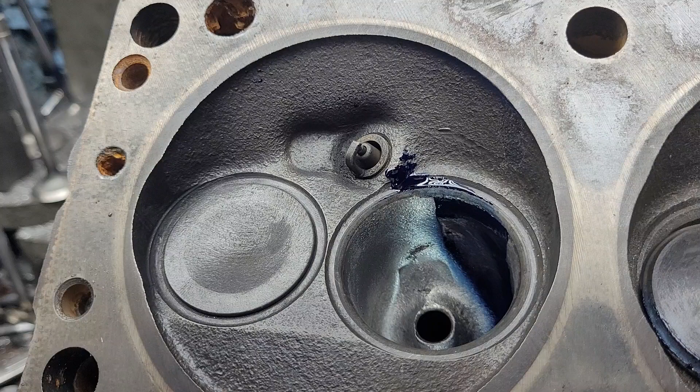Alright guys, I promised I would do just a bowl blend. So the valve job hasn't been touched. The bowl blend is what I consider a deep bowl blend. I did not do the guide, I did not touch the valve job, but obviously we got some liquid improvement. That looks nice and wide on the side of that bowl.

I'm actually quite happy with the way that turned out so far. I did take a lot of metal out of the bowl. I was quite impressed with how thick these castings are, 300 plus most areas. That means if you're a do-it-yourself type of guy, you can basically take 100 thousandths off everywhere if it's not a corroded head, and you should be more than safe.

We got a little Dykem on the valve, on the evaporation ridge, and this very edge here has got blue on it. A couple little splatters, but overall pretty good for a bowl blend.

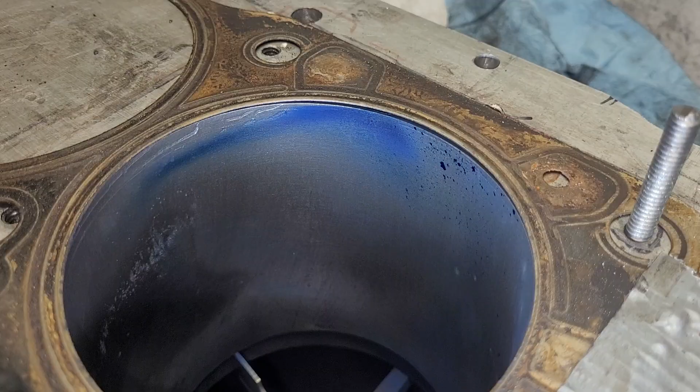Let's take a few more views of this. Before I forget, let's take a look at the bore adapter. The flow around the bore adapter is quite a bit different. Completely stock, it only had a small coating at the very top.

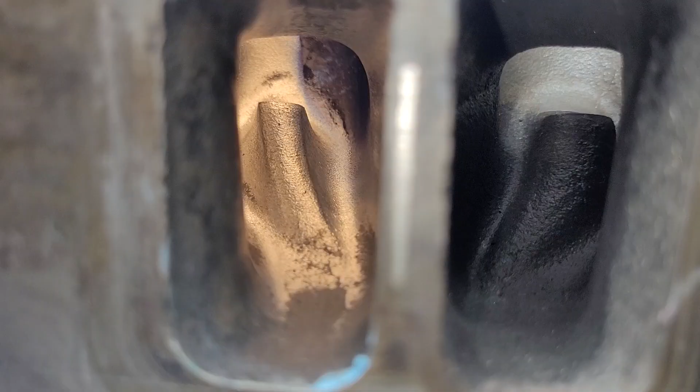Deep bowl blend means I took part of the guide boss out, but it's nowhere near shaped the way DV did it. You can see I definitely did parts, the bowl was considerably wider than it was, but there are still spots on the bowl that have the stock finish.

Because of the way the stock bowl is designed, it's bigger than it should be in certain spots, I should say. The pinch hasn't been touched, so it's quite tight. And I did do some work on the short side.

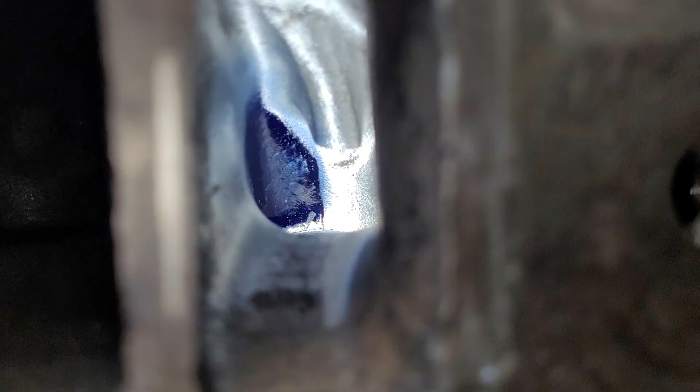Let's flip it and take a look. You can see the short side radius did get widened a little bit on both sides, according to the air speeds. I did not really change the top of the short side radius. You can still see the casting marks from the mold.

You can see the Dykem still has very much a straight head. The other side of the short side radius got the cuts removed, blended, widened a touch, done.

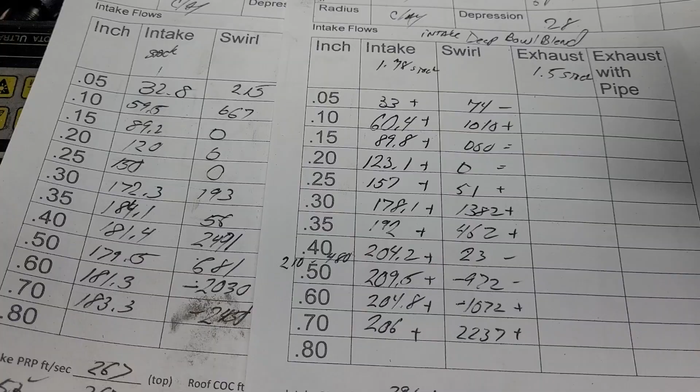Okay, so how did we do as far as flows? Let's take a look at our flows, guys. I don't know if I mentioned it already on this video, sorry, but that bowl blend took me about 3 hours, so it's not a little bit of a bowl blend, it's a lot of a bowl blend. How do we do as far as flow? Well...

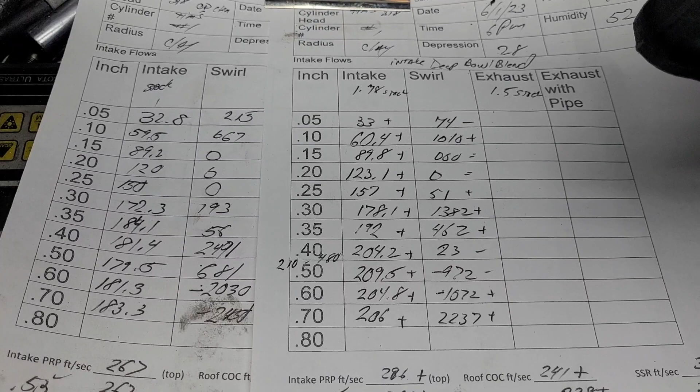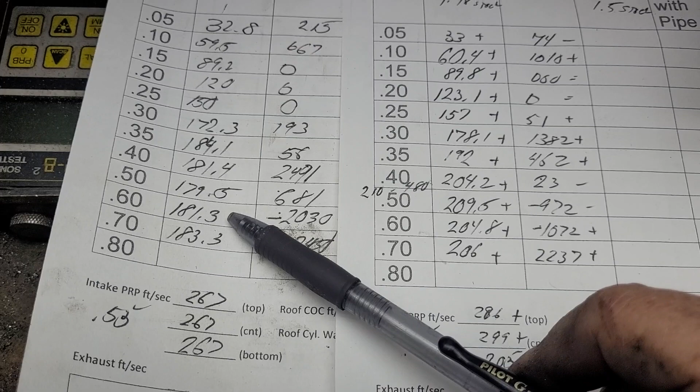Plus, plus, plus, plus, plus. Our peak was 210 at about 480. Our peak here was 184. That's a decent step up for just doing the bowl.

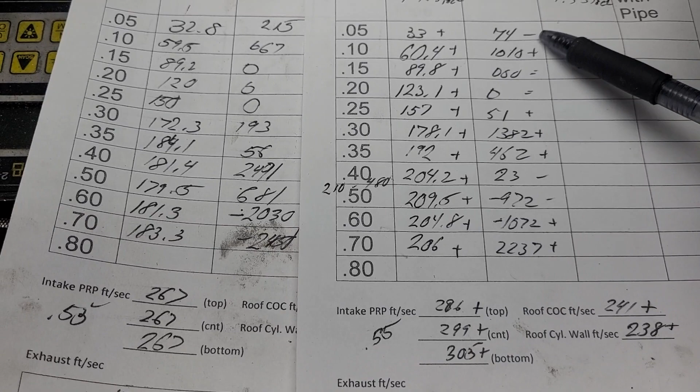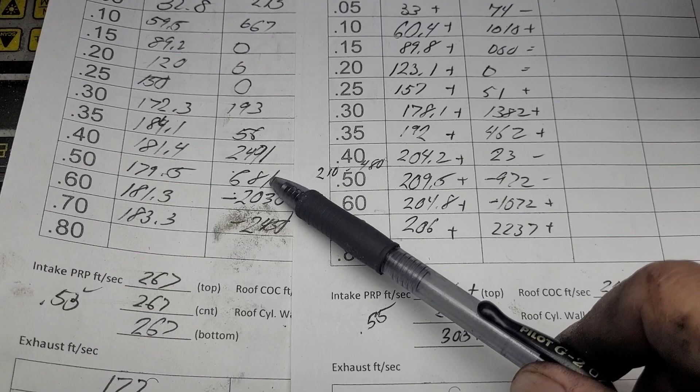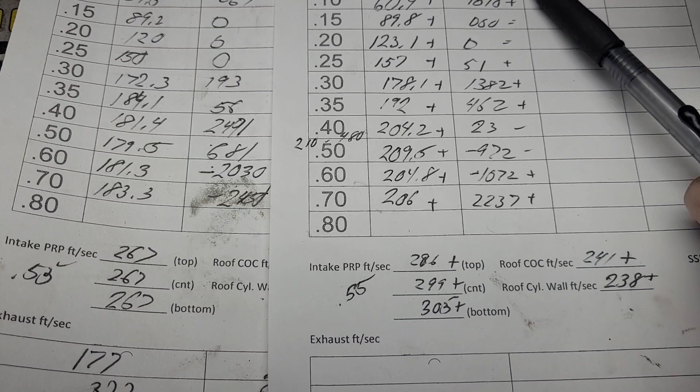As far as our swirl, it's hit or miss, but it doesn't go backwards as far, so it's a step in the right direction. But it also went backwards in a different spot. This was 680 positive, this was 972 backwards. This is 2030 backwards. This was 1072, this was 2,450 backwards. This is 2,237 forwards. So the swirl curve is improving.

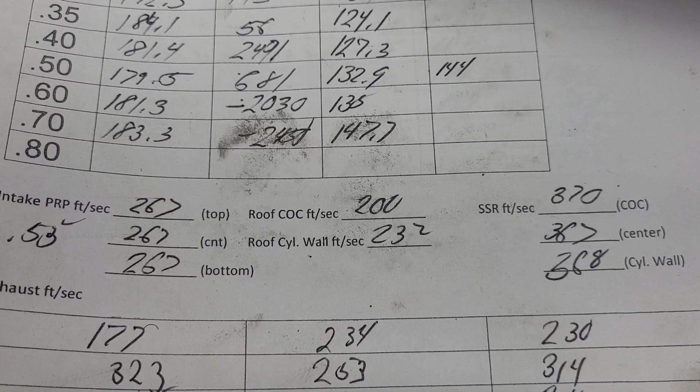Is it where we need it? Not yet, no. Now let's take a look at our air speeds. This was the stocker, and I put the pluses and minuses on here.

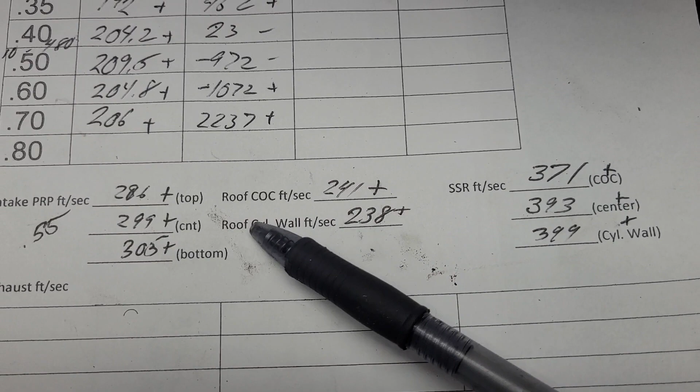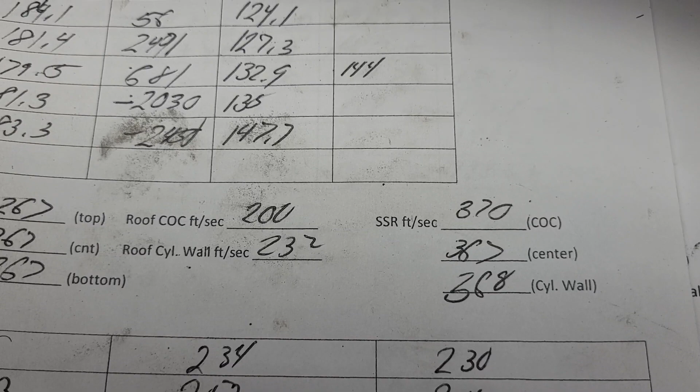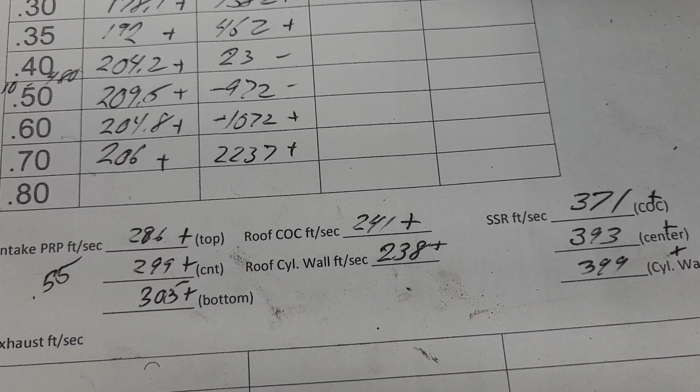The pinch went up quite a bit because it's the same size and it's passing a lot more air. So that makes sense. The center of the cylinder went up considerably, the cylinder wall side went up a little bit.

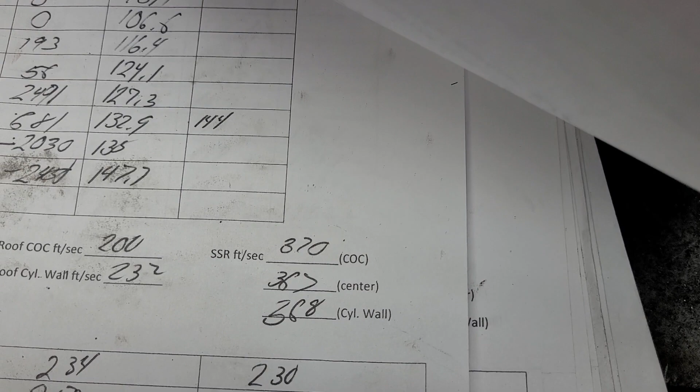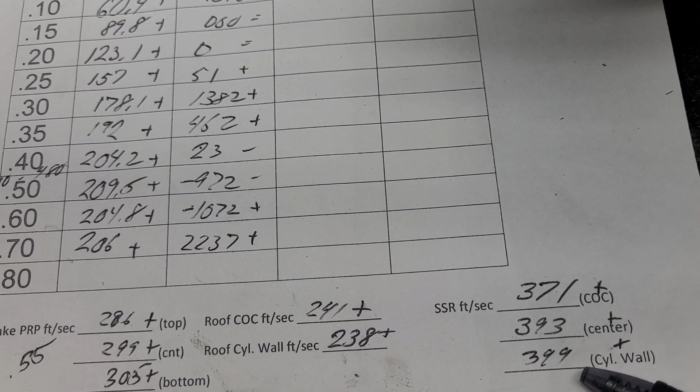It gives you an idea where the air changed from side to side, right? And as far as short side, center of the cylinder went up 1, but the other 2 went up quite a bit. 399 is fast. We got a lot of air going past the short side radius. That was at 550 lift.

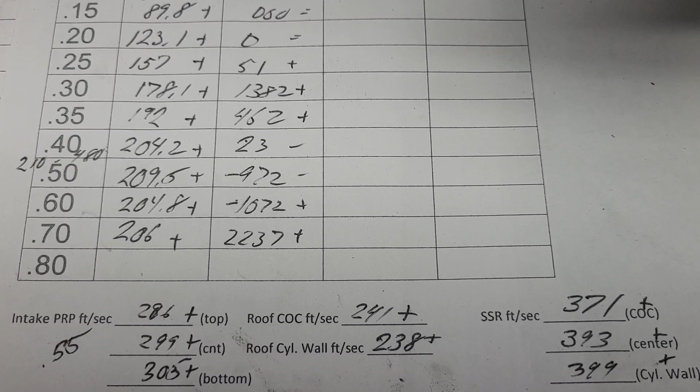And if you look at the curve, 550 is already having problems with the short side. It's already past separating on the short side.

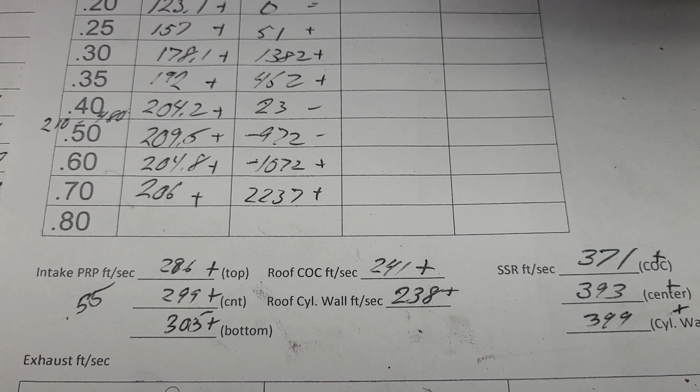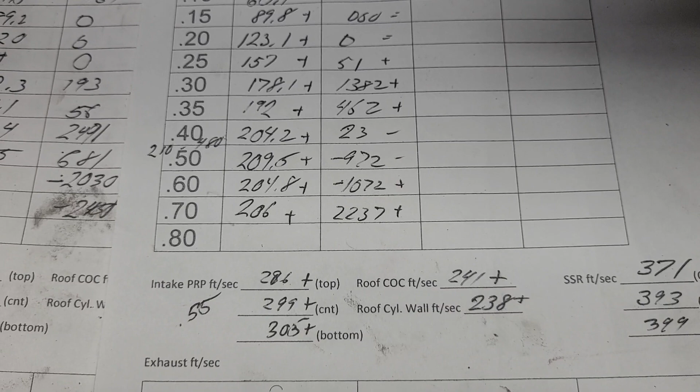Why did I stop it there? Because those air speeds are in reference to the last one I did that was at 550. And since that's the size cam we're probably going to be using, that's where my air speeds are going to be measured from.

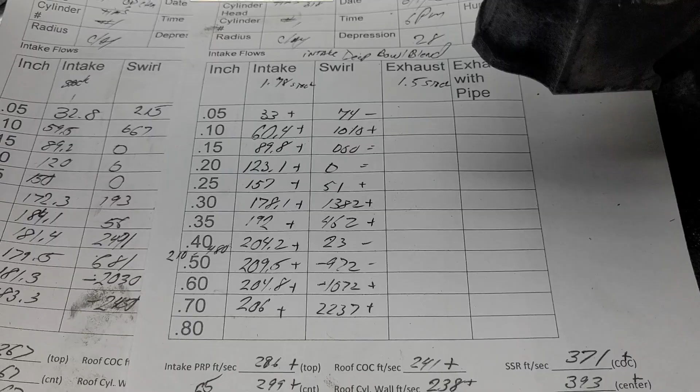Tonight I plan on doing the exhaust bowl. I don't know, it's already late. I had to get a bunch of stuff together for DV. I may not get that done tonight, but that's going to be our next video coming up. It's just going to be the bowl blend on the exhaust, same idea. I'm just going to do the bowl and we'll compare it to the completely stock one.

And then we'll move on step by step like that for guys that are trying to learn this. You know, what area gives us the biggest gains, okay?

So, for doing just a deep bowl blend, we got a nice pickup. Now remember, the chamber hasn't been touched, valve job hasn't been touched.

By the way, if you put a good intake manifold on that, I make a nice warm 318. Yeah, deeper.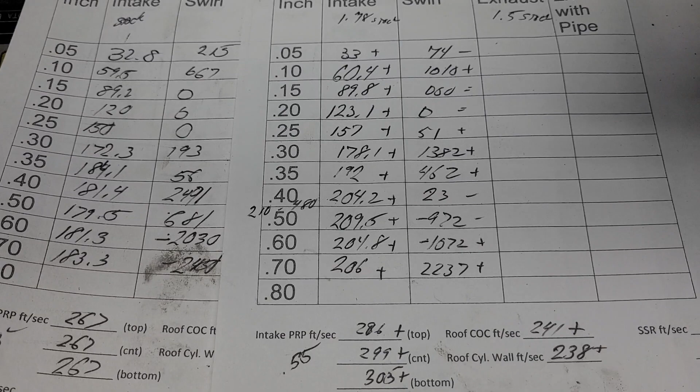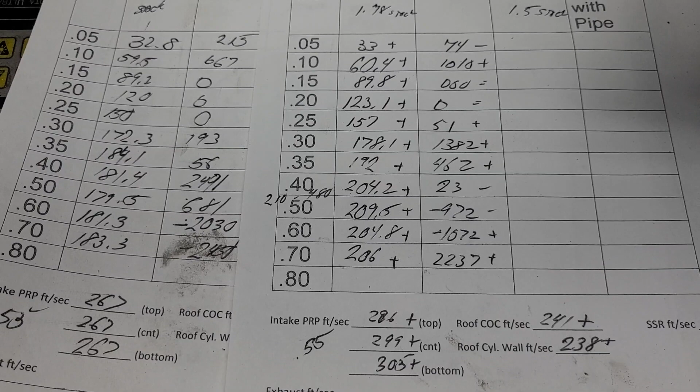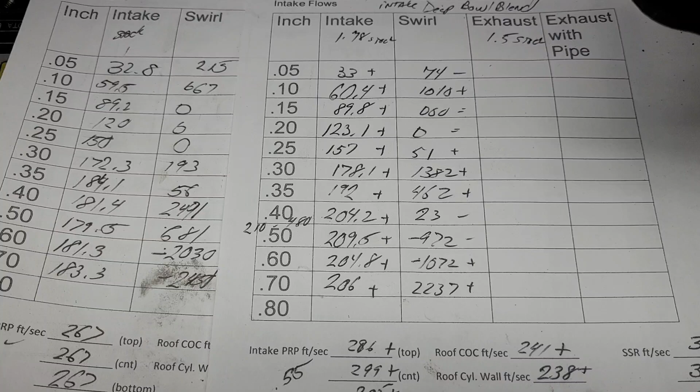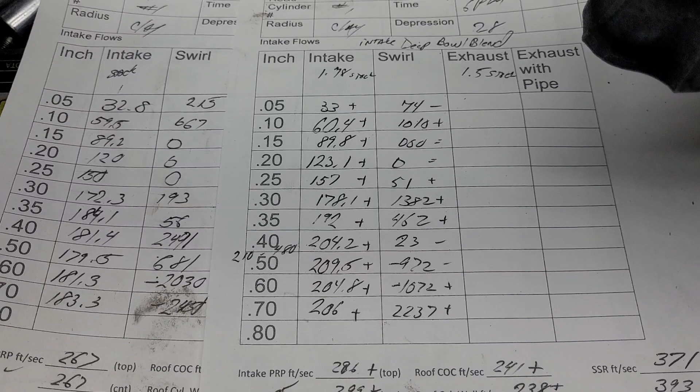Alright guys, can't think of anything else I need to talk to you about. I do - DV's coming up with a video where it's the chunk of the 675 after I've done a little work to it. The info that he has is not even up to date because I did some more changes to it and I haven't measured it. So in reality, they're going to be a touch different, but they're not necessarily better. Just FYI.